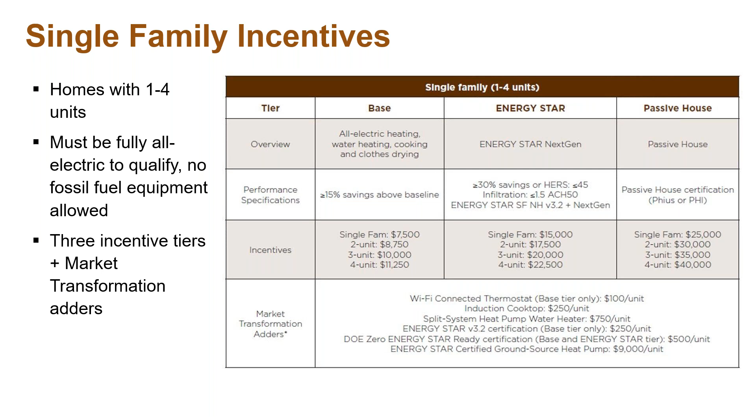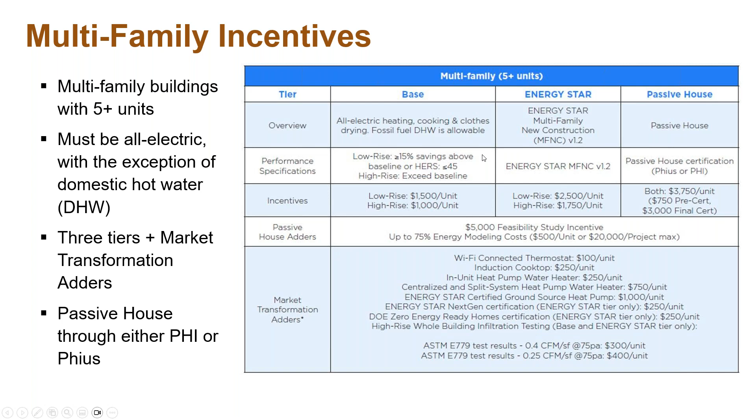Yeah, thanks for having me today. I'm excited to be presenting to you, especially with the great program and incentives that Keegan was just talking about. Before I go any further, I'm just going to pause for a second here and close my Outlook so I don't get unhelpful reminders about other things I'm supposed to be working on. Yeah, I'll save a draft of that. Okay, let's go back here.

All right. So as Keegan mentioned, this is Dean Gamble speaking. I'm the technical manager for the Single Family New Homes Program, and I'm very happy to be talking with you today. So let me briefly run through the agenda and then we'll jump right in because we actually have quite a bit to cover. I'm going to start with a brief summary of the new federal tax credits, which is actually driving a lot of interest in national version 3.2 of our program, which we'll be talking about today.

It's an even better picture in Massachusetts, where you have the generous local incentives that complement this. Next, I want to provide a general overview of the Single Family New Homes Program, including the key features applicable to nearly every certified home. Third, we'll do a deeper dive into National 3.2, what differentiates that version from other versions and how to prepare for it. And then finally, I'll end with an introduction to ENERGY STAR NextGen, which Keegan just mentioned there are specific incentives tied to. That builds on top of 3.2.

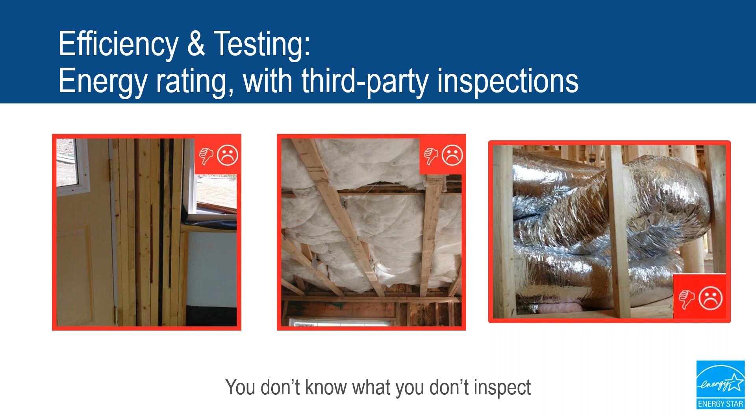Now, hopefully you're already familiar with ratings, and I know in Massachusetts a lot of you are, but if not, here are the very basic steps as they apply to ENERGY STAR. First, the third-party inspector called the rater completes a preliminary energy model and ENERGY STAR design review before construction even begins. During construction, the rater completes 2 on-site inspections to complete what's called an Energy Rating Index, or ERI rating,

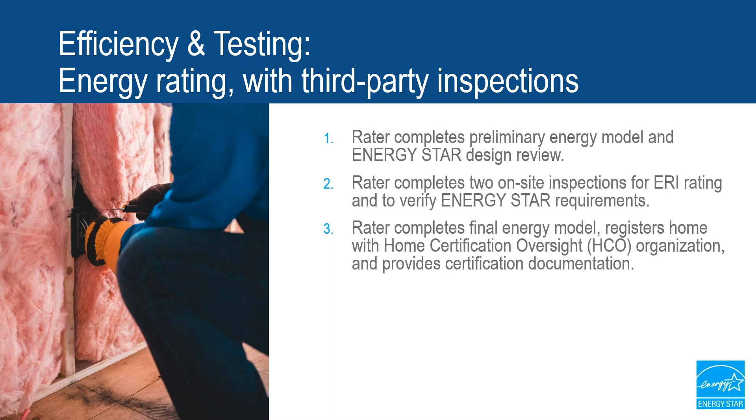which you may know as a HERS rating, and to verify additional ENERGY STAR specific requirements. And finally, the rater completes the energy model, registers the home with their home certification oversight organization, and they provide documentation of certification to the builder.

So doing an energy rating is an easy but critical first step. Every builder can, and I think should be, doing an energy rating on their homes. Otherwise, you're just flying blind.

Now, fortunately, we know that a lot of builders have taken this first step. More than 360,000 homes were rated in 2023 alone. And in Massachusetts, this is so impressive, over 9,500 ratings were completed, representing 98% of all new homes. So that is amazing. The state is already doing a fantastic job on conducting ratings.

As I mentioned, these ratings result in an energy rating index, or ERI score, that represents the relative efficiency of a home. You may know them by their proprietary brand, HERS Ratings. And this is a scale that's roughly 0 to 100.

A high score represents a home that uses a lot of energy, meaning it's not efficient. And like golf, the lower the score, the better. A low ERI rating means the home uses less energy and is relatively more efficient.

So for context, an ERI of 100 is equivalent to a home that meets the 2006 IECC, and a score of 0 represents a home that uses no more energy than it produces. That means you can only achieve a score of 0 if the home has on-site power production like PV panels.

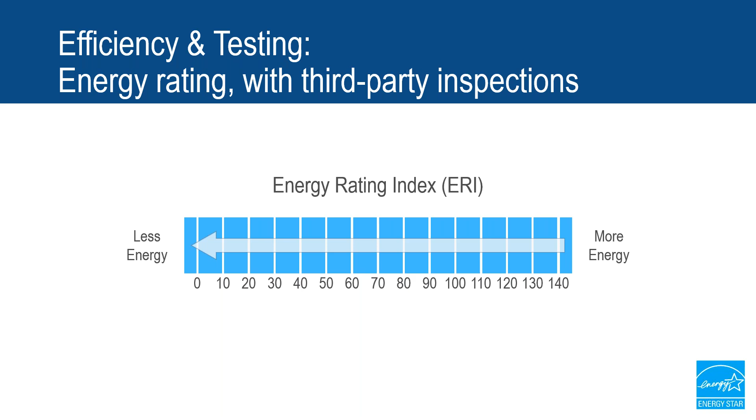In other words, an energy rating is simply an assessment. While it's a critical first step, it doesn't necessarily mean that the home is efficient. A terrible home like this can also get an energy rating. It might get a score of like 130, and that's better than not knowing it's 130, but it doesn't make for a good home.

Because of that, we go beyond just doing an energy rating. We lock in above code performance. And in most states, including Massachusetts, we do this using what we call an ENERGY STAR ERI target for each home. Energy rating software automatically determines this target for each home.

Let me quickly show you how that's done. Once the house that's pursuing certification is entered into rating software, the software automatically creates a target home with the same key architectural features like foundation type, house size, number of stories, and orientation, as well as the same location.

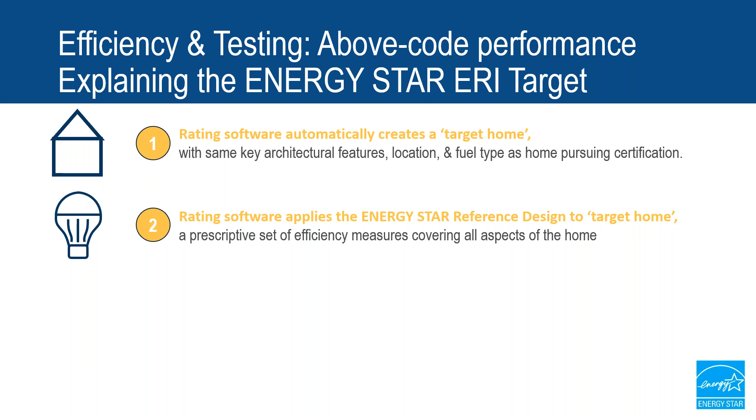And fuel type. Next, the rating software applies what we call the ENERGY STAR reference design to that target home. And the ENERGY STAR reference design is a prescriptive set of efficiency measures covering the house from top to bottom. So insulation levels, infiltration, duct location, equipment, appliance efficiency, the whole shebang.

Step 3, the rating software calculates the ENERGY STAR ERI target, which is the ERI that results from the target home configured with that ENERGY STAR reference design.

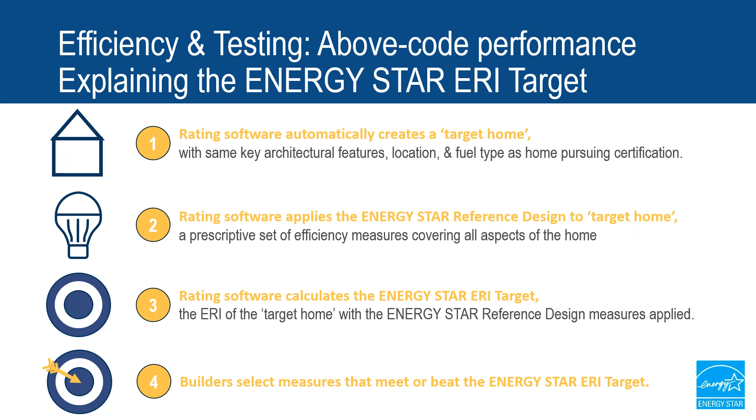And then once the ERI target has been calculated, builders then select efficiency measures that meet or beat the ERI target. And note this is the same process that the Zero Energy Ready Homes program uses to define its performance target as well. They just have a different reference design.

So for example, let's say that you model a home you want to certify and the software calculates that the ENERGY STAR ERI target for that home is a 52.

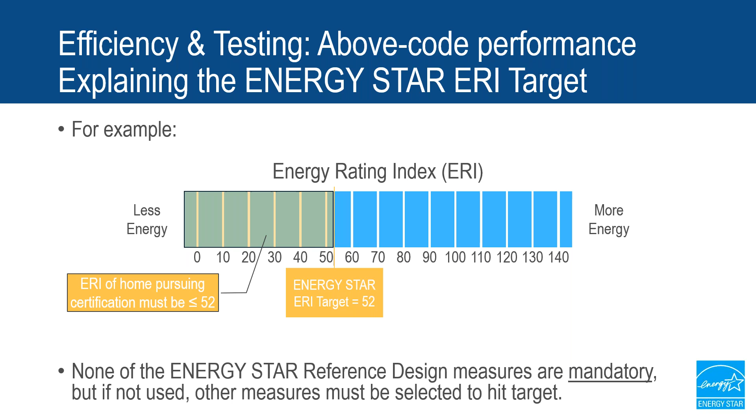That means you have to select efficiency measures that meet or beat 52 for this particular home. So none of the ENERGY STAR reference design measures are mandatory for hitting that target, but if they're not used, then other measures have to be selected instead.

Okay, so what are the ENERGY STAR ERI targets? Well, that depends on the program version. Now our goal is to define targets that produce savings of at least 10% relative to code-built homes. And for most states, single-family new homes, national version 3.1 is in effect, including in Massachusetts. Those are the states that are shown in blue. And that version requires an ERI target of about 55 to 65 for most homes.

National 3.2 is implemented in states that have adopted the 2021 International Energy Conservation Code, or an equally rigorous code, and those are shown in yellow. Now, additional states are going to move to National 3.2 if they adopt the 2021 code, and Massachusetts is definitely a state that we're keeping our eye on.

In addition, as we discussed, it's also required in most states starting in 2025 to receive the federal tax credit. And as you'll see later in the presentation, it's also required for ENERGY STAR NextGen. So National 3.2 has a lot of applications, and it has a more stringent ERI target, which is about 45 to 55 for most homes.

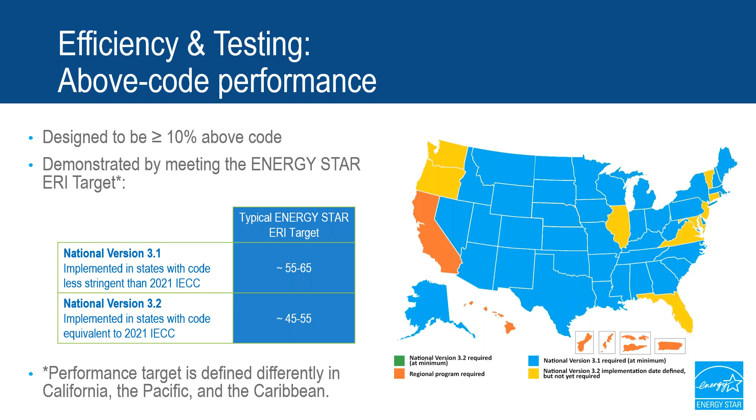That is the foundation of the program, above code performance that's demonstrated through a third-party rating. If you're already doing that, as a lot of people are in Massachusetts, you're more than halfway towards certification. On top of the efficiency that's locked in, we're just adding a handful of extra features.

We're adding 3 comfort features, and the first is what we call a complete thermal enclosure system. And that means a few things. First, having high enough insulation R values and high performing windows to be effective. That's what we call the thermal backstop, and we'll talk more about that later in the presentation.

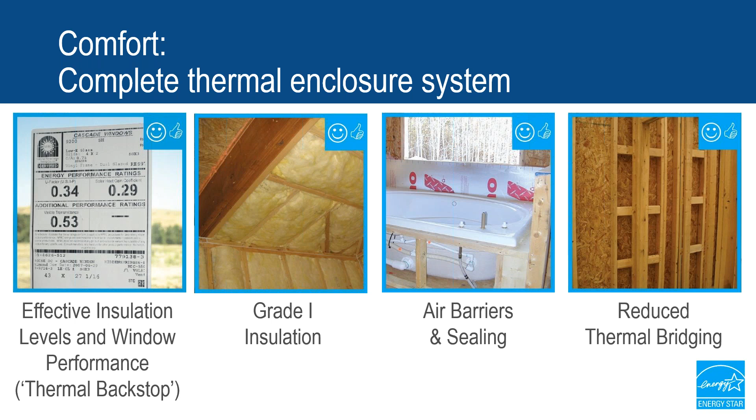So remember that term. Second, it means achieving grade 1 insulation installation. That helps the builder get the R value that they paid for, and it reduces the chance of comfort complaints. Third, it means air barriers and air sealing to help the insulation work properly, reduce hot and cold air from intruding, and reduce pests. And fourth, it means using strategies to reduce thermal bridging in your walls.

The second comfort feature is properly sized and installed HVAC systems. Unfortunately, this just can't be taken for granted. Studies have shown that there's improper airflow in nearly 50% of residential systems. I didn't say that incorrectly, it's literally half. An incorrect refrigerant charge in 60 to 80% of systems. So you can't just assume that everything is okay. You need to actually check.

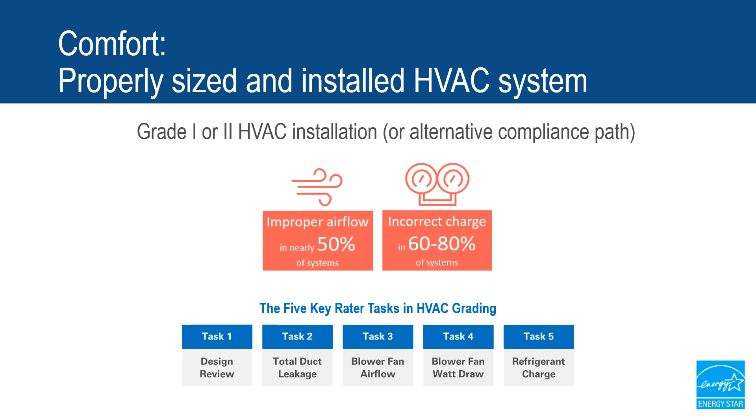Now, there are a few ways to accomplish this in the ENERGY STAR program, but the best way is through HVAC grading. That's a series of 5 tasks that the rater completes, resulting in a grade for the HVAC system, either 1 meaning great, 2 meaning okay, or 3 meaning bad. And for ENERGY STAR, you have to achieve grade 1 or grade 2.

The third comfort feature is bedrooms that are comfort balanced. Homeowners spend more time in their bedroom than almost any other room, and when bedroom doors are closed, as they often are at night, air can become trapped. It's not enough to supply conditioned air to each bedroom. The air also needs a path back to the HVAC system.

Now, there are a variety of ways to create a return air pathway, such as a transfer grill, a jump duct, dedicated returns, which are more common in the Northeast, or, not as recommended, maybe something as simple as an undercut door. We had a builder who worked with us for like 10 years.

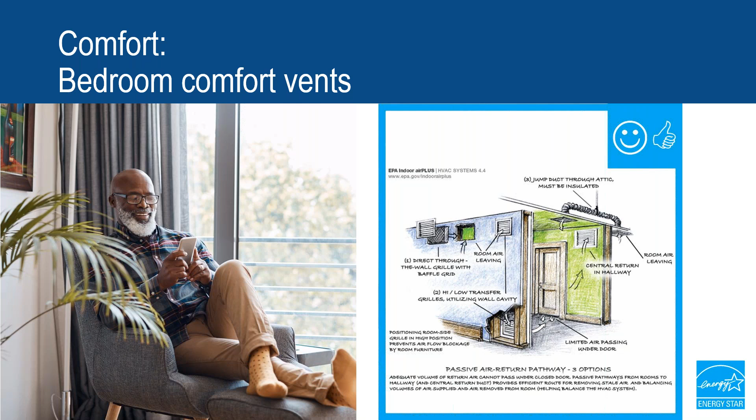They resisted this particular feature tooth and nail. They just didn't see the value in it. And then at some point, their in-house HVAC design team finally realized, it just clicked for them, that their HVAC systems were not working as expected. And they were not working because they didn't have the return air pathway. So they ended up incorporating this feature into all their homes nationwide, even where they weren't doing ENERGY STAR, because it's really important to include this feature.

Moving on from comfort, we're adding 4 air quality features, which are more valuable now than ever before. Because we're building a high performance home, we're going to build it tight and ventilate it right. And that means we'll add a whole house fresh air system to deliver a consistent amount of fresh air into the home.

Now, there are a variety of options to do this, from a bath fan with a special control to an inline supply fan, all the way up to something like an energy or heat recovery ventilator. But the point is, the system is going to have control over the air that enters the home instead of leaving it up to the whims of Mother Nature. This is now required by code in nearly half of all states, but even where it isn't required, it's really something you should be doing regardless for the health and comfort of your home buyers.

So that was bringing fresh air in. The other half of the air quality equation is taking the bad air out, and so we'll add vented exhaust fans in the kitchen and in full bathrooms.

Maybe you already know that cooking creates contaminants like formaldehyde, fine particulate matter, and excessive water vapor. You're really kicking up a lot of bad stuff into the air. There's a reason that commercial kitchens have enormous range hoods with huge rooftop fans. In the home, range hoods that are installed in recirculation mode just blow these contaminants, unfortunately, back into your face. So it looks good, but it's not really doing a whole lot for air quality.

So we want these range hoods to be installed with ducts that go to the outdoors to get those contaminants completely out of the home. In some cases, they also have to meet sound limits.

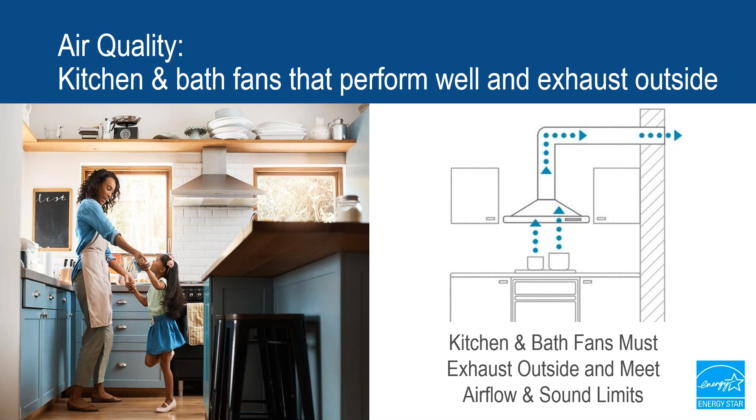Moving on, each ENERGY STAR home and apartment includes a MERV 6 or better filter in the heating and cooling system. That's going to remove contaminants from the air as it passes through, and it has to be properly installed so the air goes through the filter rather than around it. So that is a very straightforward requirement.

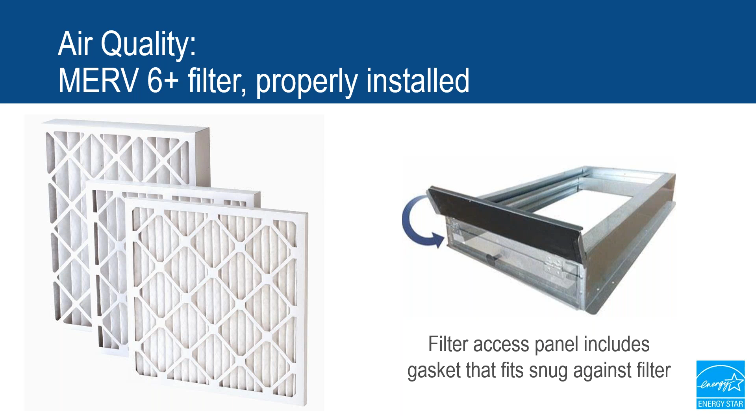And the fourth air quality feature is combustion safety, which comes in a few different flavors. Most of our partners use power vented or direct vent appliances, or just use electric appliances, like the program is incentivizing, that avoid combustion issues altogether. Other options would include keeping the combustion appliances outside the home's pressure boundary, or having the rater do combustion safety testing. So whatever strategy you use, this is really just a question of due diligence to keep your home buyers safe.

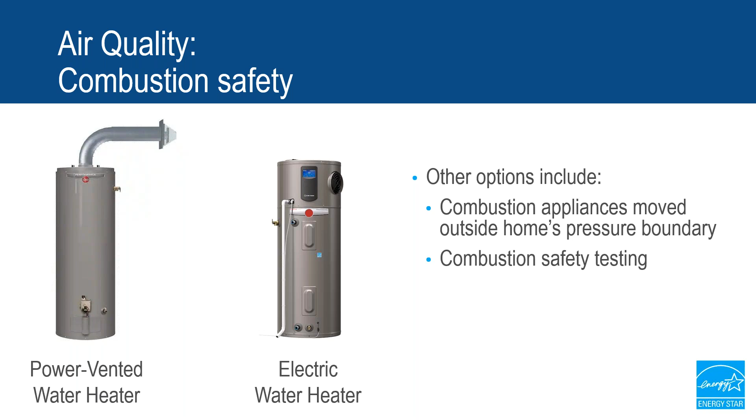And finally, we have one key durability feature, the water management system, which basically means proper flashing to keep bulk moisture draining away from the home. In other words, don't tuck your raincoat into your underwear. That is sage advice for your whole life.

This is simply a list of details for the builder to implement, not a checklist to fill out. And almost all of this is baked into code, so it's not really asking for much more than builders should already be doing. But we know it's super important for high performance homes because leaks and other moisture issues can be so damaging. And in fact, many of our partners go above and beyond these requirements already. For example, they have third-party assessments throughout the year.

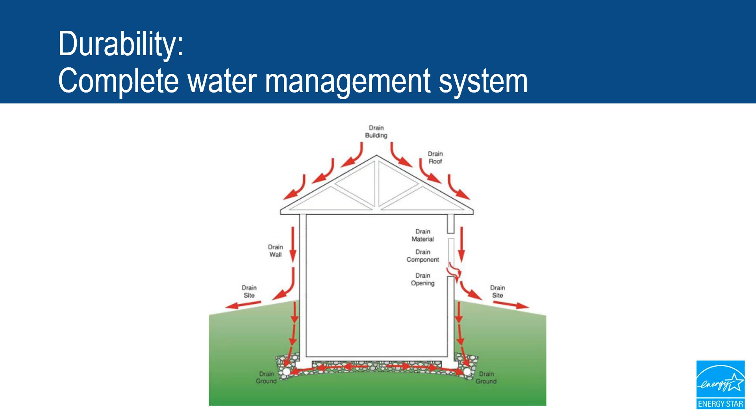So that's it. You can fit the ENERGY STAR features on one page: an energy rating that locks in above code performance. That gets you about halfway there, with 3 added comfort features, 4 indoor air quality features, and a set of durability details. And just ask yourself, which of these features would you tell your client to leave out? Which would you leave out of your own home? And just how hard and expensive would it be to add these features after the time of construction?

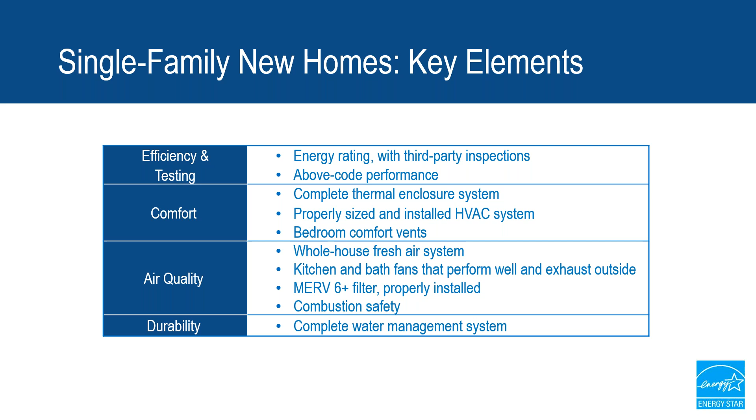Okay, so at this point, you already know 90% of what you need to do to comply with National Version 3.2, because the requirements we just reviewed are applicable to almost every version of the Single Family New Homes program. Now we'll get into what differentiates National 3.2 from earlier versions and how you can prepare for it.

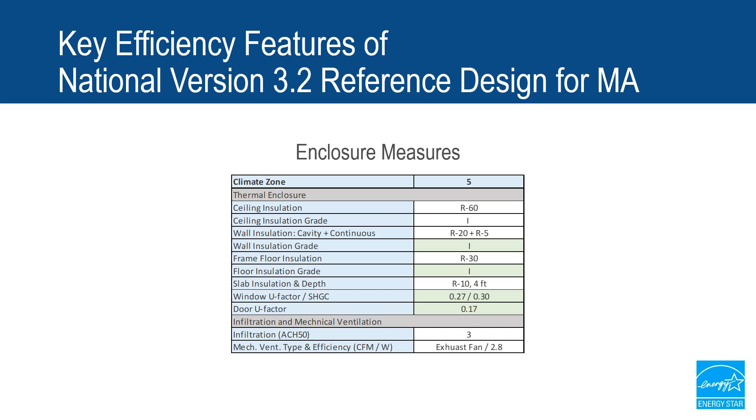We start with insulation levels aligned with the 2021 IECC prescriptive path, achieving grade 1 insulation installation, plus windows and doors aligned with the latest ENERGY STAR product spec at the time we were developing version 3.2, and an infiltration of 3 ACH50.

Now let's talk about the non-enclosure measures of the version 3.2 reference design in Climate Zone 5. It's configured with furnaces generally aligned with the latest ENERGY STAR furnace spec. Heat pump efficiency and AC efficiency align with the latest ENERGY STAR product specs for those categories.

With all HVAC systems installed well, 100% of ducts located in conditioned space, an ENERGY STAR level water heater, 100% LED lighting, along with an ENERGY STAR level refrigerator and dishwasher.

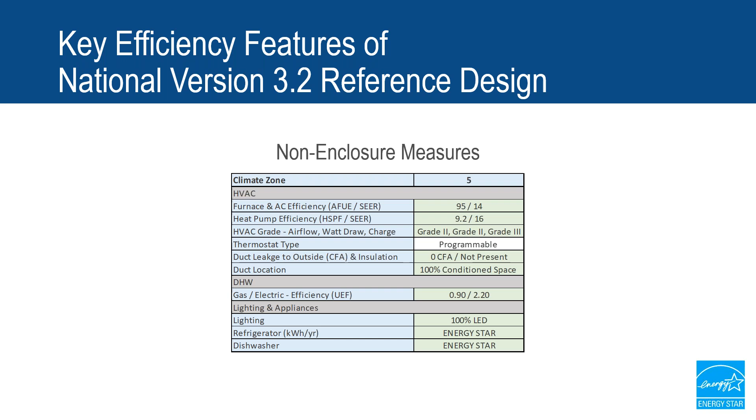When this reference design is applied, it results in a target of about 45 to 55 for most homes. By definition, if you include all the measures we just reviewed, you'll hit that target.

But you're not required to use those features per se. Builders are free to mix and match measures as long as they hit the ENERGY STAR ERI target. With that said, it's going to be sort of difficult to do that without several key features.

The 2021 IECC insulation levels or equivalent, ducts in conditioned space, and an instant gas water heater or a heat pump water heater. So you should start with the assumption that you'll need to include these three measures, and if you don't want to use one or more of them, know that you're going to have to work fairly hard to avoid them and still hit the target.

Let's explore those trade-offs a bit further to give you a little more intuition. I modeled a 2,400 square foot, two-story home with a conditioned basement and a heat pump in Boston.

I started by modeling a home with the same features as the version 3.2 ENERGY STAR reference design. The ENERGY STAR ERI target for this home is a 51, squarely in the middle of that range from 45 to 55. Not surprisingly, the home achieved a 51 because it has the same features as the reference design.

Next, I tried tweaking the insulation level. I backed off from R60 to R49 ceiling insulation and down to R21 in the walls with no continuous insulation. To compensate, I improved the windows to 0.25 U factor with a slightly higher solar heat gain coefficient, and I increased the foundation walls to R21. This worked fine; I was still able to hit the target.

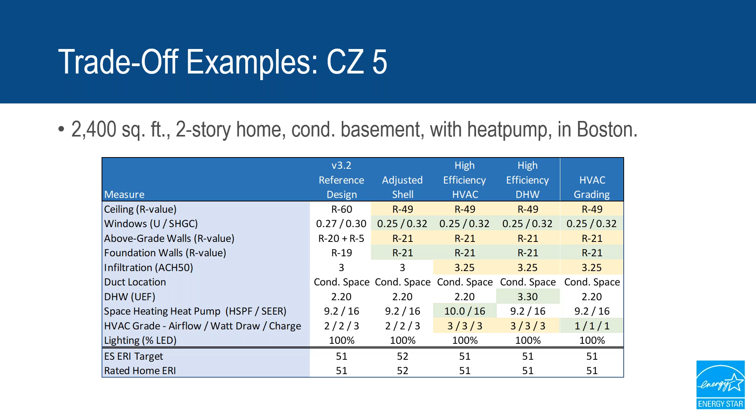And finally, I stuck with the modified shell, but I backed off the infiltration a bit and used grade 1 HVAC instead. So you can see with these examples that you do have some flexibility to adjust things at the margin, but I think you'll find that you can't leave out the key features like ducts in conditioned space unless you're really going to double down on everything else.

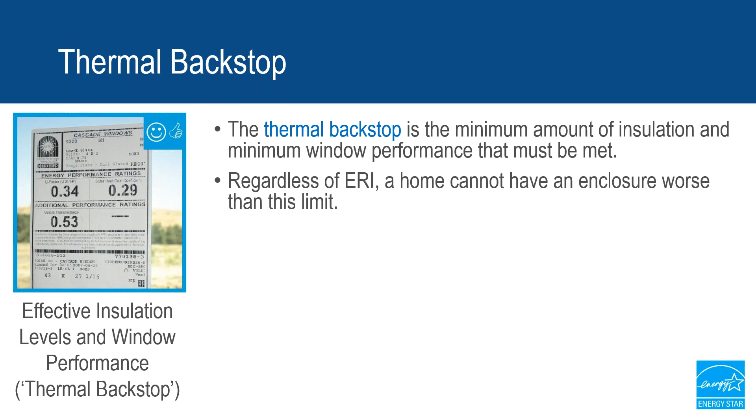The more rigorous ERI target is the first difference between National 3.2 and the prior versions, and the second key difference between National 3.2 and 3.1 is a more stringent thermal backstop. As discussed before, one component of a complete thermal enclosure system is the thermal backstop. This is the minimum amount of insulation and minimum window performance that must be met for the home to be certified. So regardless of the ERI target that a home hits, it can never have an enclosure worse than these limits and still be certified. But a home can trade off between ceiling, wall, and foundation insulation, windows, and doors to meet this thermal backstop.

More precisely, the thermal backstop can be defined by a single number, which is the area weighted U factor for the enclosure. You simply multiply the U factor for each assembly by its area and sum those numbers up. You'll sometimes see this number referred to as the building UA value. Now I know that UA is a little bit geeky, so I want to quickly show you some examples to help you understand this concept. These calculations were done on a 2,400 square foot two-story home with 15% window area to floor area ratio.

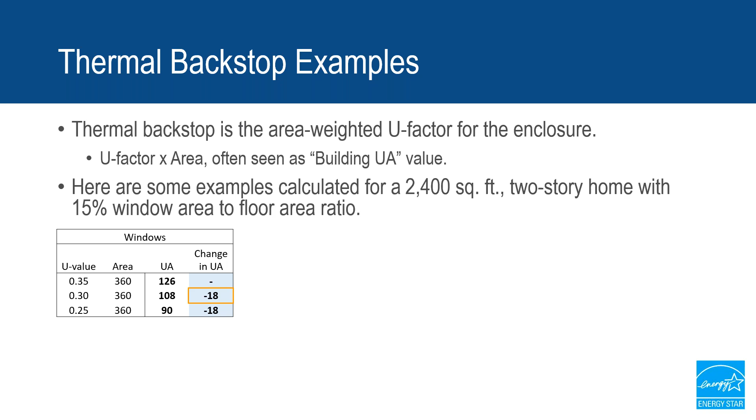Now let's look at walls. We're going to do the exact same calculations here. All I want to point out is the change in UA. So going from R13 to R15 has about the same impact as improving the windows from 0.35 to 0.30. You can also see that going from R13 to R15 has about twice the impact as going from R19 to R21.

In other words, diminishing returns as you increase the insulation. And finally, let's take a look at ceilings. Insulation levels are pretty high to begin with in ceilings, so increasing the R value has a pretty modest impact. In short, if you want to improve your UA, you'll get the most bang for your buck from windows, then walls, and then ceilings.

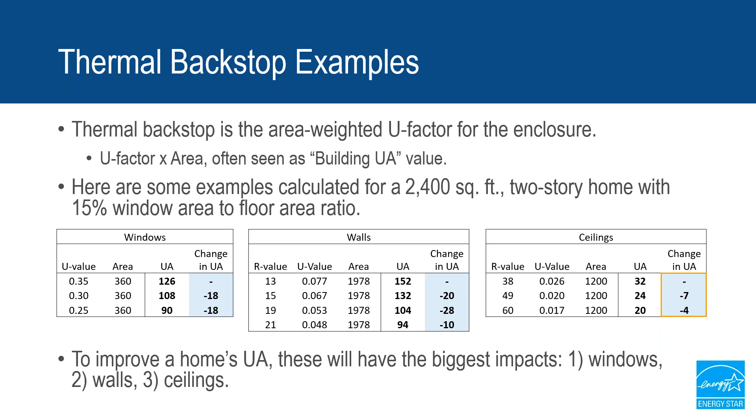So what are the thermal backstops of the ENERGY STAR program? Under National 3.1, the thermal backstop is tied to 100% of the UA of the 2009 IECC prescriptive path. For homes certified using 3.2, the thermal backstop is more stringent. It's aligned with the 2021 IECC prescriptive levels. For homes permitted before January 2025 and certified using version 3.2, a thermal backstop of 105% is allowed, so it's a little bit less stringent. After that, it drops down to 100% of the 2021 IECC UA.

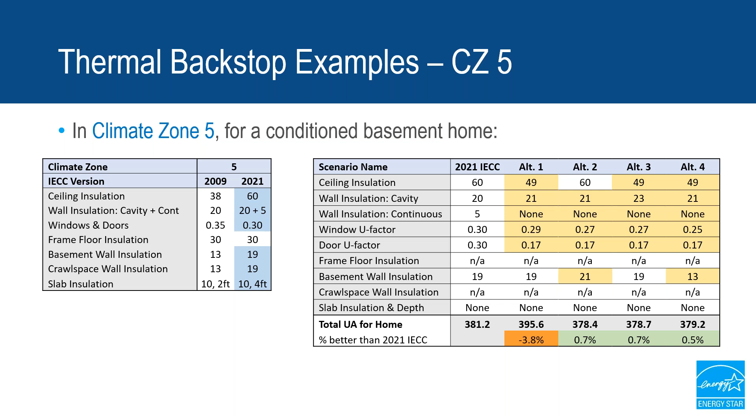I'm really encouraging partners to take a close look at windows, particularly for mixed and cold climates. While windows with a U factor of 0.25 or better may have been rare in the past, we think the market is going to be developing and evolving quickly here. That's because there was a new product specification for ENERGY STAR residential windows, doors, and skylights that went into effect last October. This is the spec that allows window manufacturers to put the ENERGY STAR label on the actual product. I think that's really going to increase the availability of efficient double and triple pane windows. That's because the ENERGY STAR window spec has really high market penetration. The most recent estimate from 2020 was that 84% of windows shipped in the US were ENERGY STAR certified.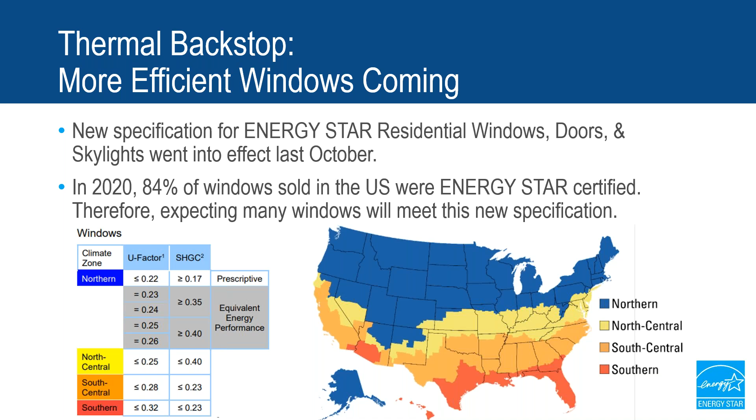So here's the new spec. You can see that in the blue region, which covers Climate Zone 5, it requires a U factor between 0.22 and 0.26, depending on the solar heat gain coefficient. And what I've heard from our windows expert at EPA is that windows down to, say, 0.24 U factor or so can be made with double pane, not triple pane technology. So it makes it really easy and affordable to drop these into your designs. I encourage you to ask your window suppliers about this, see if they have new options, particularly in that 0.24 and 0.25 U factor range.

That was a lot of information, so it's time for a pop quiz. First up, what's the key difference between version 3.1 and version 3.2? Option A, you have to meet a more stringent ERI target. Option B, you have to meet a more stringent ERI target and a new thermal backstop. Or option C, battery storage is required in every home.

So let you think through that for a minute. All right, we're over 50%. The numbers are rapidly rising. Just about to hit two thirds if one more person answers. Okay, great, we're at 70%. 96% of you are correct. The answer is B, it's a more stringent ERI target and a new thermal backstop. Those are the only two changes.

Let's do another poll question. What's the typical range of ERI targets for version 3.2? Is it A, about 0 to 10? Is it B, that it's 50 for every single house? Or is it C, that it's about 45 to 55 for most homes? All right, people are thinking through this one.

People are geared up to answer now—their responses are coming in much more quickly. It's great, so we're almost at two-thirds. I'll wait for another second, maybe a person is thinking through all their options here. Okay, we're over 70%, pretty good, pretty solid. People are paying attention. Again, 96% of you answered correctly, which is C.

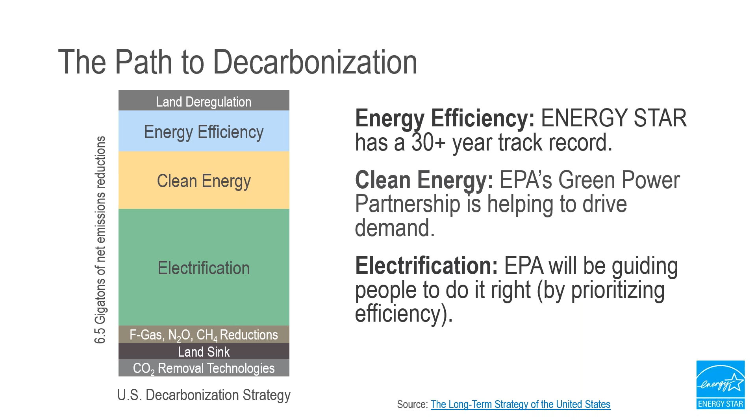Okay, sounds good, so let's start with a little bit of context here. This is getting geeky up front, so don't worry, the rest of the presentation won't be all this geeky. But according to the Department of State's long-term strategy of the United States, which defines pathways to get the whole economy down to net zero greenhouse gas emissions, the vast majority of emissions reductions are going to come from just three strategies: energy efficiency, clean energy, and electrification. So ENERGY STAR has traditionally focused on the first of those, energy efficiency. But now with ENERGY STAR NextGen, we're including elements of electrification, specifically guiding people on how to do this the right way.

So electricity is getting a lot cleaner, so by switching fuels over to electricity in homes, that can reduce emissions. ENERGY STAR NextGen builds on the successful foundation of ENERGY STAR that we just discussed.

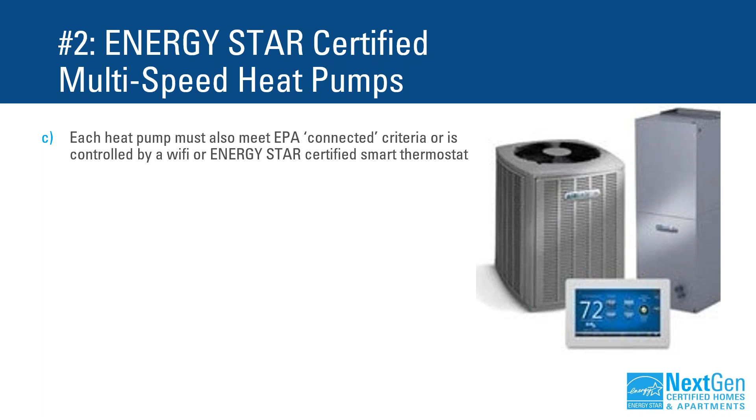Our final requirement for heat pumps is HVAC grading. Let me provide a really quick overview for those who haven't heard me talk about it. There are 5 key tasks in the HVAC grading standard: a design review, a total duct leakage test—both of those should be very familiar to current ENERGY STAR partners—and the new additions are a measurement of blower fan airflow, blower fan watt draw, and finally an assessment of refrigerant charge. Doing these 5 tasks gives you a wealth of information about the heating and cooling system that can help save energy and reduce your risk as a builder.

But on top of that, HVAC grading makes it easier to certify ENERGY STAR homes and apartments in a few different ways. It integrates most of our HVAC requirements directly into an energy rating, so there's less stuff you have to do specifically for ENERGY STAR. It doesn't require the use of a credentialed HVAC contractor, which has been a sticking point in some markets. It also eliminates the completion of the HVAC commissioning checklist, and it rewards proper installation with ERI points, which can help you meet that ENERGY STAR ERI target. It helps you meet 45L and these incentives.

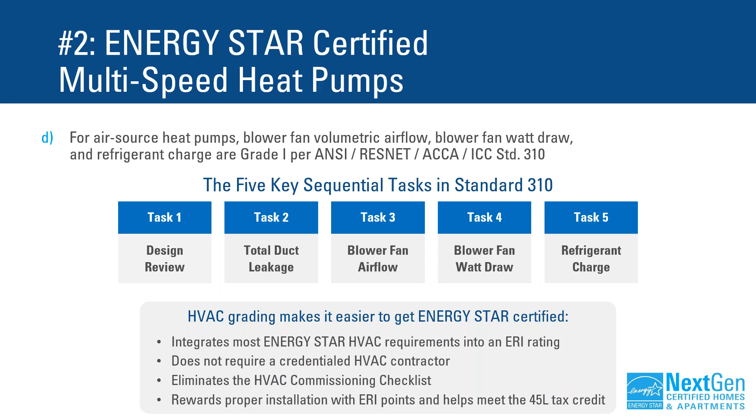So we think these systems offer real benefits to consumers. Our primary talking point on this feature is that ENERGY STAR NextGen homes and apartments allow you to take control of your comfort with a quiet and responsive heating and cooling system. And consumers are really getting wise to the benefits of heat pumps. The number of heat pumps sold outmatched the number of gas furnaces sold for the last 2 years, and that delta is only growing.

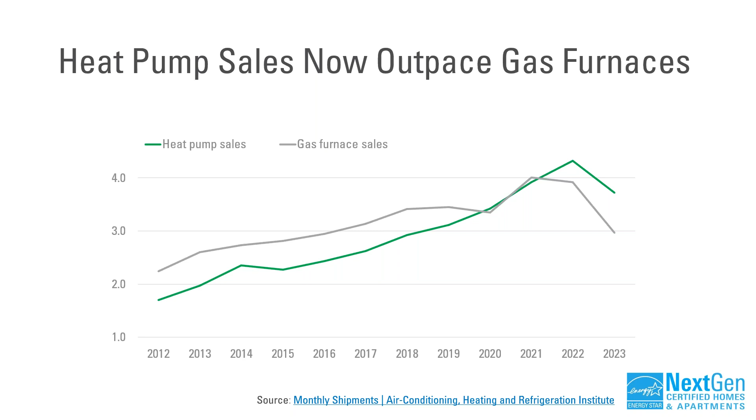Our next requirement is for efficient water heating. ENERGY STAR certified heat pump water heaters are up to 4 times more efficient. They use 70% less energy than a standard model, and they save hundreds of dollars every year in energy costs.

On top of that, we also require that they meet ENERGY STAR's EPA connected criteria. That's because water heating is an ideal demand response opportunity. Connected electric water heaters can shift up to 1 kW of demand per response event through preheating. So you still have the hot water, it's just being heated at a different time, and that requires communication ability to load shift and respond to demand response events.

So our little team has installed at least 3 heat pump water heaters in our own homes. They're working great. They provide sufficient hot water, they operate quietly, and while they do produce a little bit of cool air around them, it's not to a degree that it's a problem for the locations where they're being installed.

On top of this key requirement, we have a few other requirements related to water heaters to ensure good performance. This includes installing a quiet model with a sound rating less than 55 decibels. Since heat pump water heaters can make more noise when operating than some gas water heaters, we've included a sound rating limit that ensures they're installed within a dwelling unit's occupiable space.

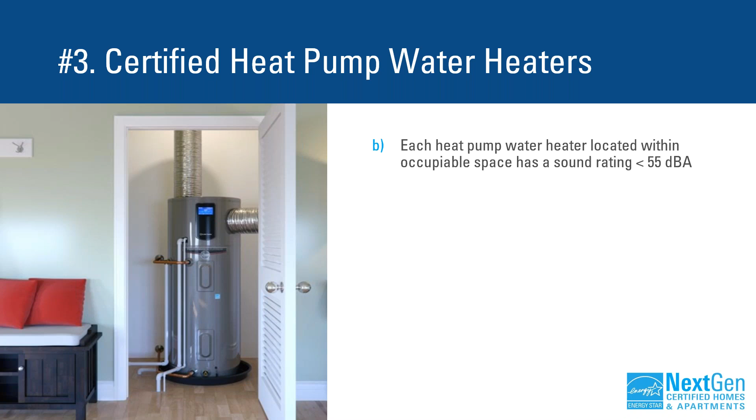This requirement will make you install quieter models, so it precludes louder units from being installed in locations where occupants would frequently hear them.

Of all the requirements in ENERGY STAR NextGen, heat pump water heaters will require the most advanced planning because integrating them into your space requires a sufficient volume of air for them to work properly. So if they aren't already part of your planning, you need to start thinking about where heat pump water heaters might be installed as you develop your future plans.

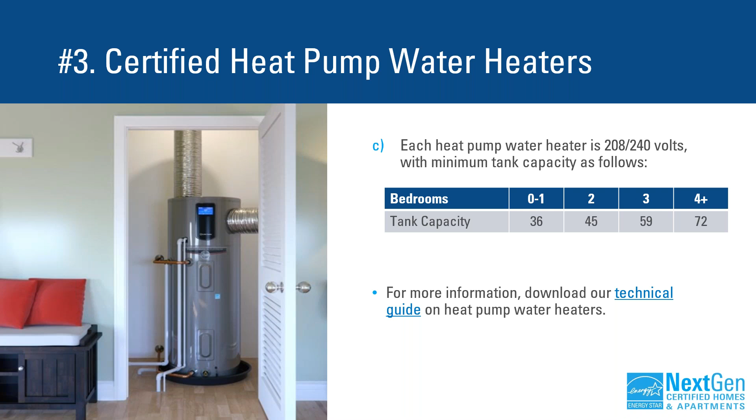ENERGY STAR NextGen is intended to be forward-looking, and the adoption of electric cooking appliances is a key enabling technology for lowering emissions in residential new construction. Optional induction cooktops, not just electric but induction, deliver consumer amenities that should be highly desirable, but a lot of buyers in the US are unfamiliar with this technology today.

They can boil water in half the time of gas, they're cool to the touch, which reduces burn risk. The cool surface also makes them easier to clean, allowing you to clean surfaces more easily and use the space as counter space when it's not on. They also offer more precise temperature control, making cooking easier.

In fact, our team has installed 2 induction cooktops in their own homes so far, and they're really loving it. This is why major appliance manufacturers are making induction a strategic centerpiece of their lineups, and it's not surprising that sales of induction ranges have increased 40% in 2022 over 2021 levels. As they become more popular, prices have started to come down. So if you include induction cooktops, you can promote this new technology and its better cooking experience to consumers.

It's also good to be aware that the ENERGY STAR team released a new spec for residential electric cooking products earlier this year, which includes both electric and induction cooktops. Kitchen appliance manufacturers have started certifying these products to the new specification, and we're closely tracking the development of those products because that might be something we require in future versions of NextGen.